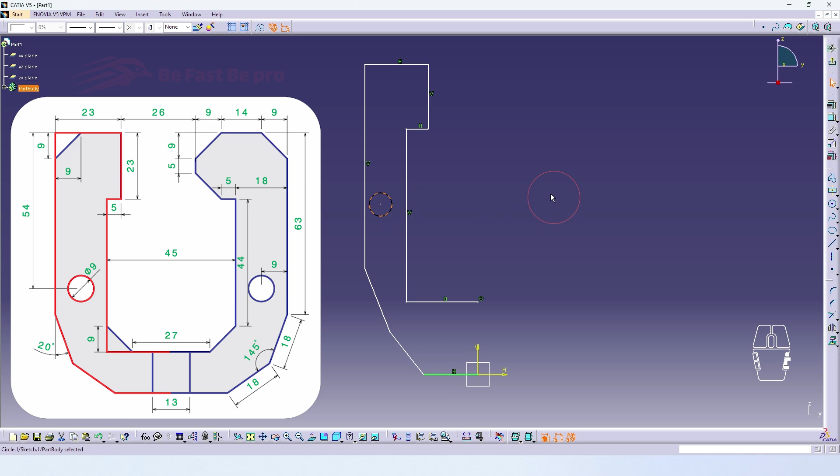Only this edge isn't symmetric, so we need to remove the symmetry constraints to make the changes.

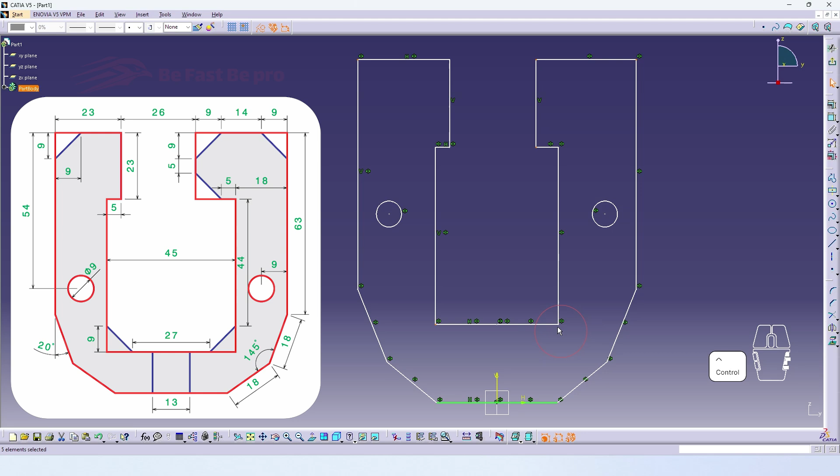We can select all the corners that need the same chamfer and apply the chamfer tool in one go. In the two-length chamfer mode, you can set each side length separately, but here, both chamfer lengths are equal.

When working in CATIA, there are a few things you definitely want to avoid in your sketches. First, open profiles. Features like pad or pocket need a closed loop, otherwise the operation will fail. Next, self-intersecting profiles. If your sketch crosses over itself, CATIA can't detect a valid contour and the feature will fail.

Overlapping elements are another problem. Elements sharing the same space often confuse CATIA and break the profile. Similarly, duplicate geometry, like lines or arcs stacked on top of each other, can mess up the solver and prevent contour detection.

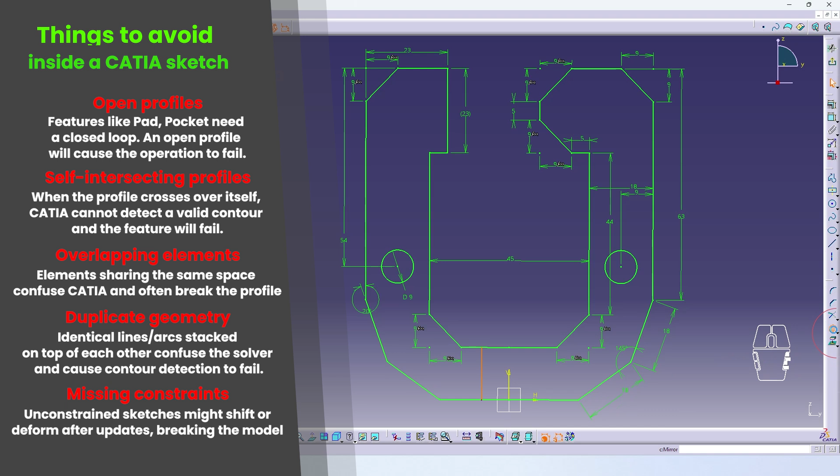Finally, missing constraints. Unconstrained sketches might shift or deform after updates, which can break your model. Keep these in mind, and your sketches will stay clean, stable, and feature-friendly.

These two lines are intersecting, so we need to fix that to make the sketch valid. You can either turn them into construction lines or mark them as output features.

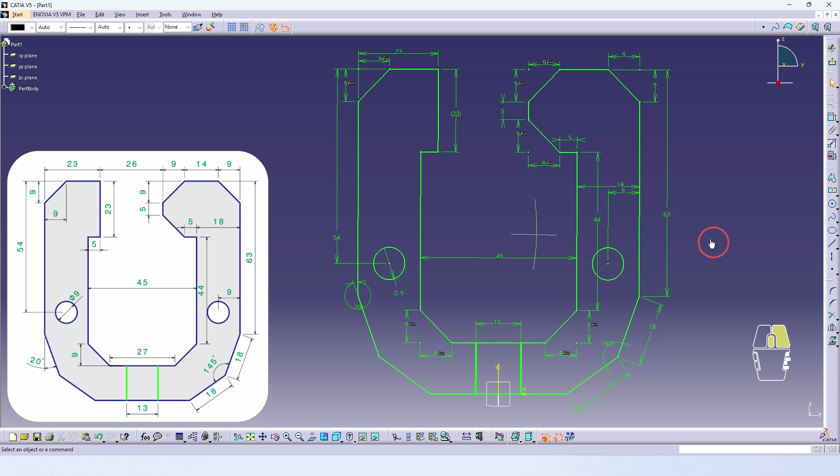When you create an output feature from a sketch element, it's removed from the main sketch and becomes independent in the 3D model.